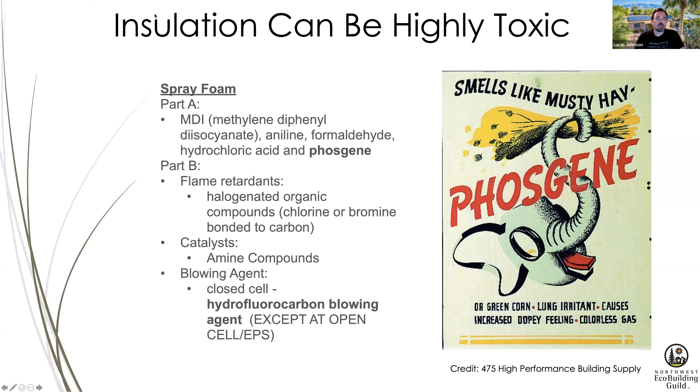A great thing that you just heard about is the red list. The red list is a group of chemicals that are known to have negative human health interactions. It's updated every few years, and it's kind of the epicenter of what you should look at in terms of chemicals to avoid in materials. Now, they can't always be avoided—some alcohol recently got put on the red list, for instance, and that is VOC. It can be bad for us, but you just got to start with the list and use that as the beginning of the decision, and also use context in what you're building and what the chemical actually is to refine that decision.

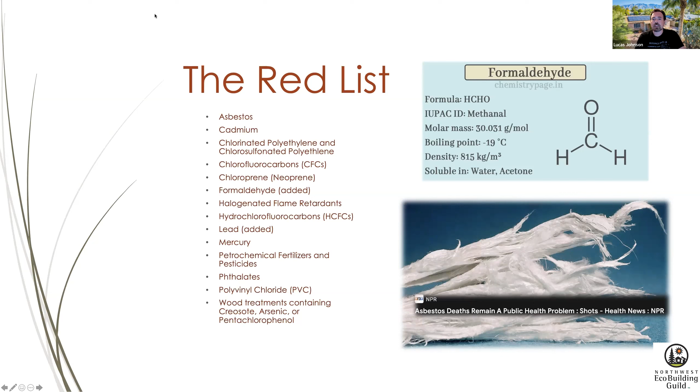When there's a lot of red list chemicals in buildings, we end up very often with something called sick building syndrome. It's where people are effectively experiencing light flu, heavy cold symptoms inside a given building, oftentimes a workplace, sometimes their own home. It's been considered a major global medical issue.

Looking into this a bit more, I didn't realize there are quite a few doctors out there, quite a bit of research on this subject. It'd be very interesting to get the medical field and the building science field together to discuss these things, because a lot of the problems are eminently solvable.

The saying I like to use, if you've heard me speak before, you've heard me say this: the ingredients create the results. There's no emergent magical property of design where you can design out all the impacts that are built into the product, from carbon to toxicity to social justice issues. If that's happened in the product life cycle before it reaches your job site, you can't control that. It's part of the product.

The image that Havelock Wool uses to summarize this is really wonderful. If your fibers are produced through a cycle of warfare, big chemical production, et cetera, exposing people all along the product life cycle to toxic chemicals, that's probably not the most wonderful result for a product that you put in your house. If the product comes from natural evolutionary cycles that have occurred over eons, with well-treated animals, well-managed forests, whatever it might be, if the raw products can come from a natural source, it can really change the game in terms of toxicity.

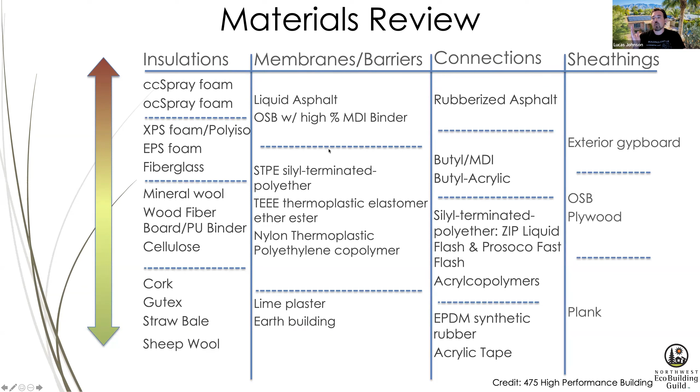So is this about materials only, or is it about much more than materials? Is it about the emergent properties that come from putting materials together in a really good way? And as if you were here early, Kathy was bringing up a really wonderful point about...

Non-toxic being a colloquialism - it's something we say all the time, but it may not actually exist. Even the healthiest materials can trigger allergies in some people, like Havelock wool insulation. Some people have wool allergies, right? Well, then it's not really non-toxic for them in a sense, not good for their health. So that's why the non-toxic thing is not that great of a way to describe things in my mind. That's again the lack of something bad, and I think we should be supporting the inclusion of something good. So I think it's better to talk about this as good or healthy building, however you want to frame it.

So healthy building requires good materials combined with good design.

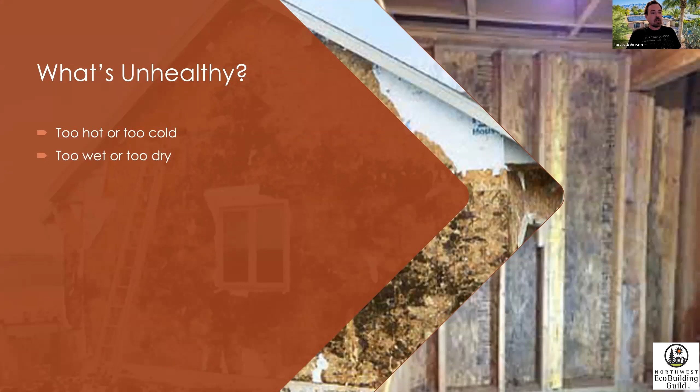To summarize what's unhealthy, from my kind of building nerd standpoint: things being too hot or too cold can cause all kinds of issues with mold. When it's too dry and too hot, or too dry and too cold, you can get a lot of viral issues. If it's too hot and too wet, you can get all kinds of bacterial and fungal issues. Toxic chemicals being included in materials, or toxic chemicals being emitted from certain things like mold, particulate matter that may exist in the air from everything from volatilizing dust when you start cooking to wildfire smoke, whatever it may be.

As I mentioned, mold, EMFs - this is something that's not as addressed as it should be. This is electromagnetic fields. There's a lot of negative health issues that can occur from improperly wiring your electrical system, for instance. Natural gas - all the research out there at this point indicates that natural gas is not good for our health and really should not be in our buildings, much less it's kind of a way to continue our addiction to fossil fuels by being less bad instead of making a real change to being all electric. But from a health standpoint, natural gas is consistently considered to be very bad.

And then pests and rodents, that's another big issue. This isn't a comprehensive list of everything, but this would be a pretty darn good start if you could basically get rid of these issues. Oh, and untreated water coming into the house, forgot about that one.

As I've been alluding to, health takes a lot more than just avoiding bad ingredients. It's not the lack of unhealthy—it takes combining good ingredients in a good way to create real health. An example would be optimizing indoor air quality through non-toxic finishes, furnishings, cleaning, good maintenance, along with continuous heat recovery, mechanical ventilation, maybe even some spot ventilation in the mix too, as we'll talk about in a minute.

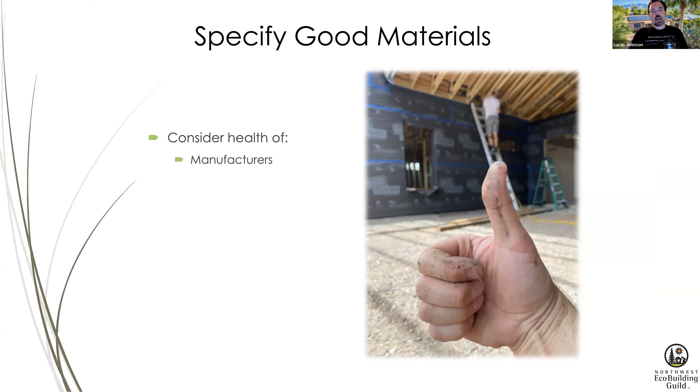So once you've created your do-not-use list, then you start specifying good materials, healthy materials - not just non-toxic, but materials that actually encourage a healthy building. As I mentioned, we want to consider the health of the manufacturers, the installers, and the occupants of the building, and we want to ask questions.

First, is it durable in my climate? If it's a good material but it doesn't work for your climate, you probably shouldn't use it - it's not going to be a good building. Will it dry in my climate? Very important question - basically the same thing, but more about whether it's going to make drying an issue in the building versus whether the material itself is durable. Is it healthy for the planet? And will it provide comfort or joy in my experience of living in this building? Those are all really, really important considerations.

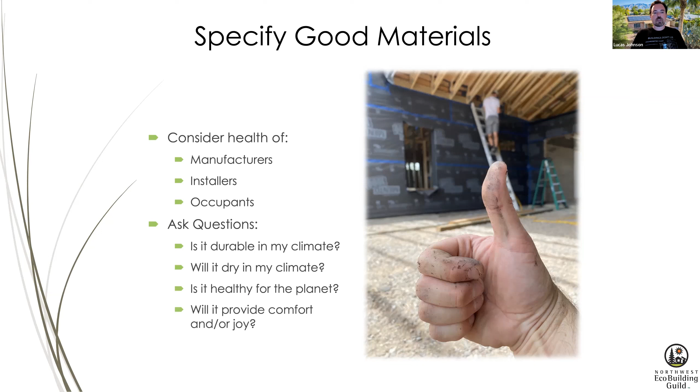It's also about having a good process. Planning and testing is something that we do extensively. This is a wall sample from our Muse project, the 4-unit project we're doing in Phoenix, where we are taking good materials that have been proven for decades in cold climates, but haven't necessarily tried to live through Phoenix summers, and seeing what happens. There's an intense amount of heat, of UV, and then also water during the monsoon season, so it's a really, really good time to try to destroy materials and see what happens.

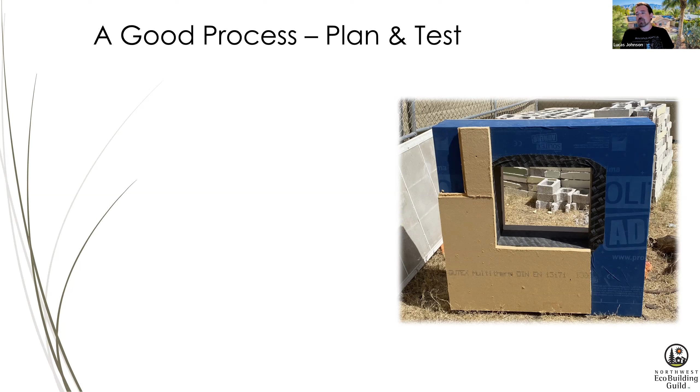As you can see in this image, if your screen isn't blocking your view here, you can see that the membrane we used, called Adhero - when we peeled it back, the plywood underneath was in effectively new mint condition. The plywood outside of the membrane had nearly degraded to dust. It was really, really crazy to see that dramatic of a distinction, that dramatic of a line.

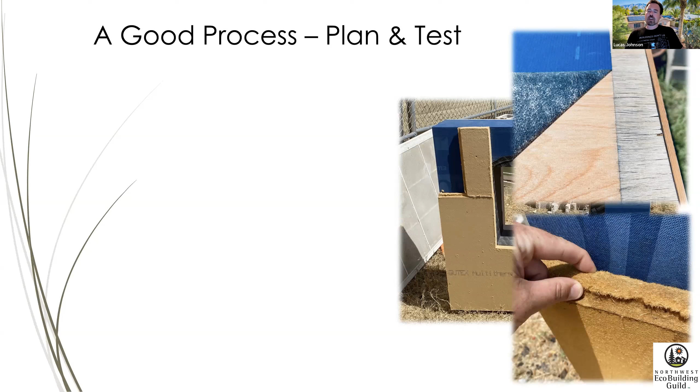And then what we noticed too is these top edges of the Gutex wood fiber insulation, that you can see my hand pinching there in the photo, had gotten quite wet and swelled a bit over time - that's not necessarily a good thing. So what we decided in the end is that every time Gutex was going to interface with an open space - top of the wall, bottom of the wall, rough openings of windows - we were going to treat it with a liquid applied yet vapor permeable, airtight waterproofing material called Visconn, so that the ends of the boards would stay dry and not become moldy. What's the point of using a good healthy material if it doesn't stay a good healthy material over time?

We also do a lot of extensive planning for how we're going to put down certain membranes that we use. This is for a subslab vapor barrier we used called Pango. Termites are a huge issue down here in the Southwest, and you often have to do extremely toxic and temporary termite treatments for your below-grade treatment, along with a standard vapor barrier.

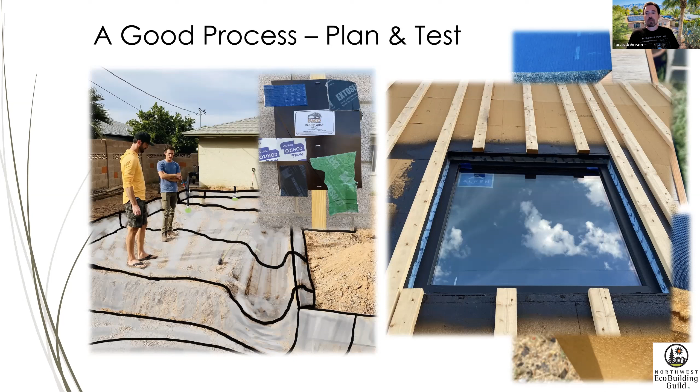But if you use this Pango material, this little black material that you can see, we tested extensively to see what tapes would stick to it. This was south facing and fully exposed to the Phoenix sun, to see what would last better. All of these are Red List free tape options that we were trying with this material, which is also Red List free. The idea there is that we got rid of any sort of toxicity in the soil system, the foundation system. The termite treatment would have to be repeated every about 5 years, but this Pango membrane should last for the lifetime of the building, which we anticipate to be well over 100 years.

So one of the messages is: be good, be healthy from the ground up. This is the Pango membrane laid down over the foundations of the 4 buildings.

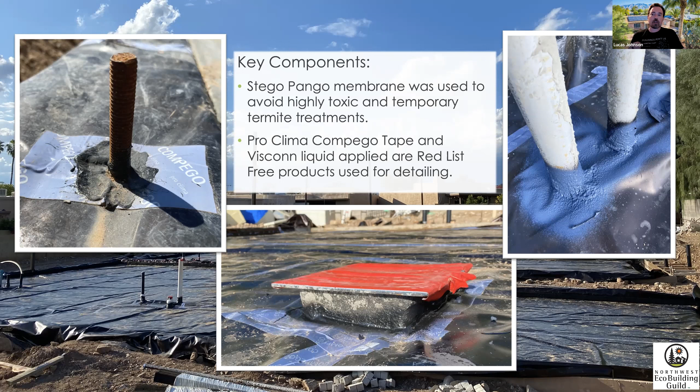So the key components were this Stego Pango membrane, which was used to avoid highly toxic and temporary termite treatments, as I was just talking about. And then the Pro Clima Compego tape and Visconn liquid applied were the Red List free products we used for detailing. You can see the tape on the left around the foundation bolt and around the drain there, and then you can see the liquid applied right after it was sprayed on over the Compego tape to make sure we had a really, really durable seal at that level, so we don't have water seeping up into our building. Because again, one of the key things of a healthy building is keeping water out of the building, or allowing the building to dry sufficiently and not get wet enough to cause issues.

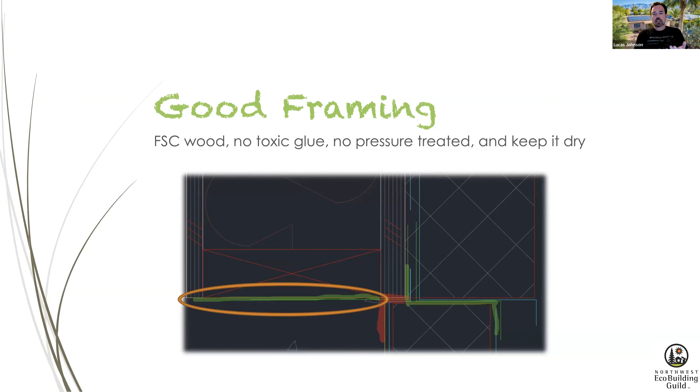The next step, once you have your foundation system down, is you need to invest in good, healthy framing, which is FSC wood, no toxic glues, no pressure treated lumber, and keeping it dry. If you use a material below your sill plate to separate it from the stem wall or slab, depending on your foundation type, you're not only creating a capillary break and air seal, but the code says that since it's now separated from rising water through the concrete, you don't have to use pressure treated for your base plates. You can use normal lumber, which saves budget and decreases toxicity.

A lot of us are putting an air sealing gasket or a capillary break gasket, or both, below our sill plates anyway, and still using pressure treated, which is kind of pointless. So we can avoid the pressure treated, decrease toxicity, and actually have a better building system by making sure we do that. This is what it could look like in the real world.

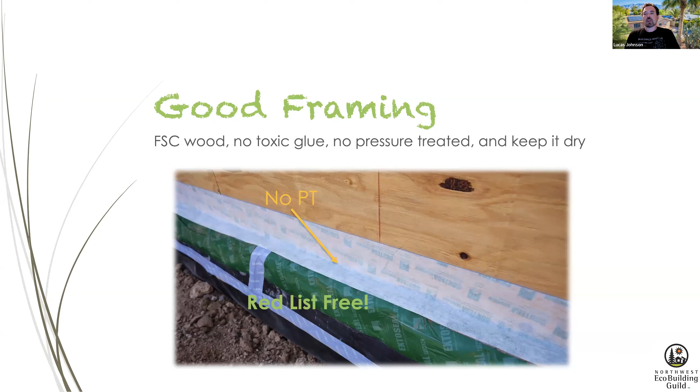This white tape is a vapor open tape used to air seal from the plywood sheathing, continuing under the base plate. That allowed an airtight, waterproof, yet vapor permeable connection at the plywood level, while also letting us avoid using pressure treated lumber. We like to say no PT, red list free. That's what we're trying to do, is all of these critical control layers with red list free materials. So even the best ingredients aren't perfect.

We use 3/4 inch plywood for structural reasons, to make our exterior insulation batten system and heavy stucco cladding work. We needed very beefy plywood, and got it from a really good lumber yard, but due to monsoon weather, some of the sheets ended up with mold on them. We had to remove those sheets and put in new ones, because we don't want to be adding mold into the building from the very beginning. We did some basic treatments to some areas, but everything moldy was removed, returned, and replaced with plywood without mold.

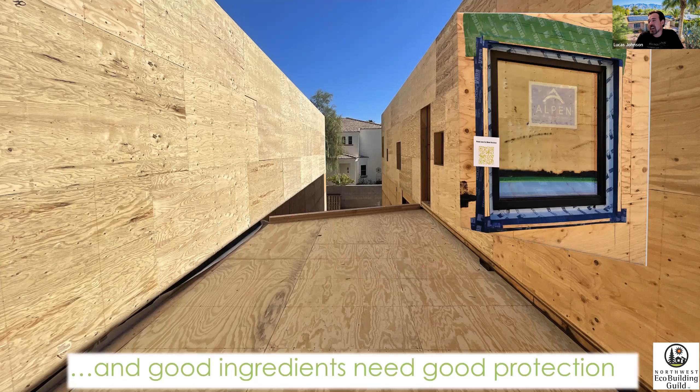The lumberyard was actually really cool about working with us on that. A lot of them will take the blame for having sent moldy lumber and will help make sure not to poison the future occupants. So just ask nicely.

Hopefully it works. Another thing is that good ingredients need good protection, especially around rough openings. There's a quote from Joe Lstiburek about how he could make amazing buildings if they didn't have to have windows or people. Those are the two things that really tend to stress the durability of the building. Windows tend to be a very common failure point that water enters at, and if water enters and does not exit, it can create all kinds of major health issues inside the building. So we ended up with buildings that look like giant blue Smurfs.

Every square millimeter of plywood was covered with a peel and stick membrane that's airtight, waterproof, vapor open, but also red list free. We were able to achieve extremely high levels of performance. These units are all lower than passive house as far as airtightness is concerned, but we did it entirely with red list free materials.

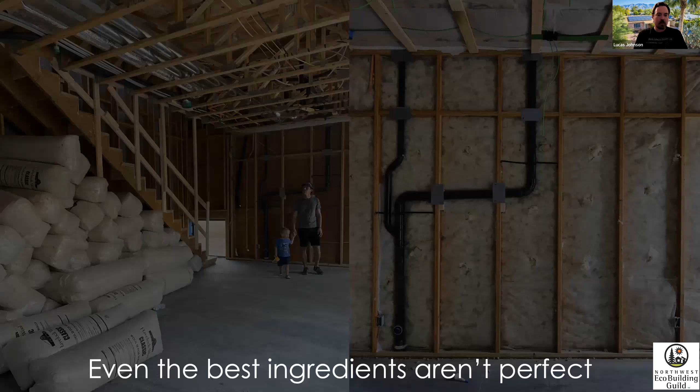On the note of even the best ingredients not being perfect, one thing we think about often is managing formaldehyde from wood products. Almost all wood products have naturally occurring formaldehyde that's going to be released at some point. The Havelock wool insulation has a property of being able to irreversibly bind formaldehyde, so having a bunch of wool around all your wood framing should reduce potential formaldehyde exposure. We'd love to do some formal research on that, but that's hard to make happen. Maybe soon we'll try.

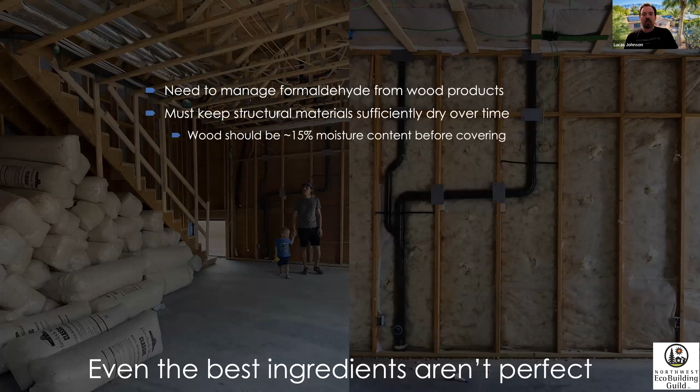Keeping structural materials sufficiently dry over time is obviously mission critical, one of those things I'll keep repeating. Some data: wood should be about 15% moisture content or less before covering, that's your sheathing, your framing, etc. Remember that everything will get wet at some point somehow, so allowing it to dry is very, very important.

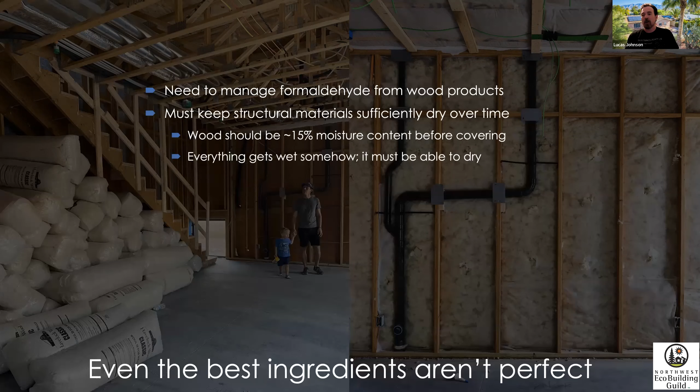Moving into good insulation. So now we're framed up. What are we going to do to insulate the building? What are we going to do to not just be non-toxic, but to make it healthy, to add another degree of comfort? So we need to use healthy, vapor permeable, low carbon, and durable insulation options.

This is going to be some of the ones that we love. One of the big questions we always ask again and again is, what are the ingredients? In terms of insulation, an analogy we like to think about is, if it were a jacket, would you wear it? Because you're going to be living literally inside of it. It's like having a jacket with a hood that's slightly looser around you. Or is this a tent that you would go live in? It's just bigger space and you don't see the insulation because it's covered by finishes. But would you actually want to be surrounded in a bubble of foam insulation? Me, no, I really would not.

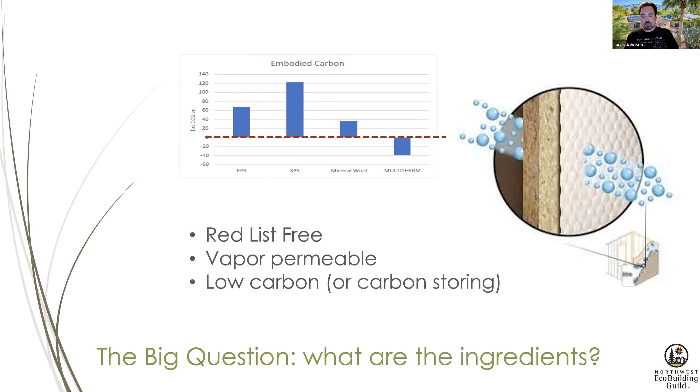Exterior insulation, cork is another option we absolutely love. There's some really regenerative and interesting things about cork and the cyclical economy it's created in, in Portugal and all that stuff. So it is a really neat product that we would love to keep using more of. One of the cool advantages is it can be used as both your cladding and your exterior insulation, so it can kind of be an all-in-one situation. That's kind of a tough sell for a lot of clients, but for the right client, it could be a really, really good option.

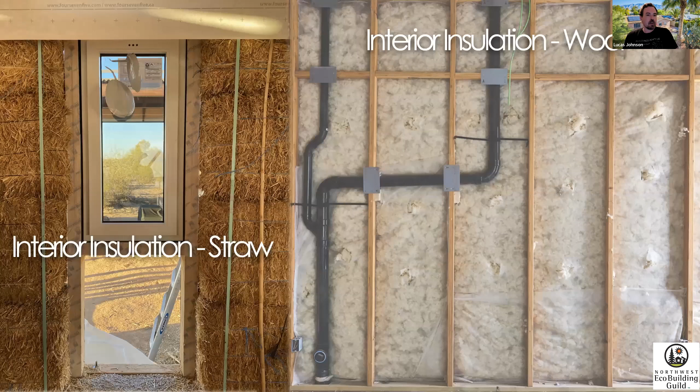Interior insulations that are healthy that we love: wood insulation, again, is one we really like. There's also loose fill and bats available. Straw insulation - I'm calling this interior, even though it spans interior to exterior, but it kind of takes the place of your cavity insulation, so in my mind, I'm considering it interior insulation.

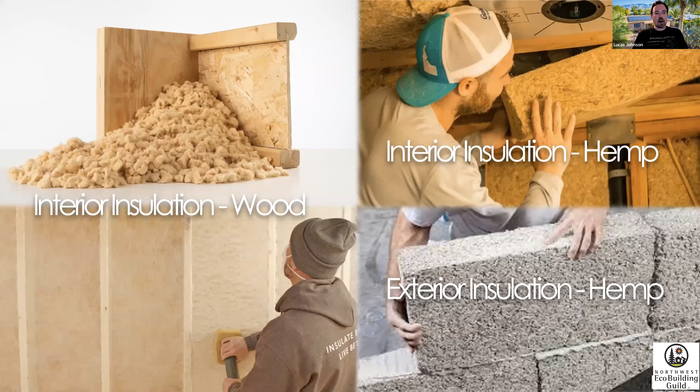Wood, as I've mentioned, is a wonderful product for interior insulations and exterior. Hemp bats, hemp wool bats, are also a really great interior insulation product. And then for exterior insulation, hempcrete is an amazing product as well that we should certainly start using more of.

One of the cool things about hempcrete is it actually sequesters CO2. All these other materials generally are carbon storing, which means that they hold the carbon they've absorbed throughout their life cycle up until they're installed, stored until the product is removed. But that's storage - it's by nature somewhat temporary. Sequestration requires a phase change and a permanent fixation into something. So hempcrete's really neat in that it actively draws carbon dioxide from the air when it's curing and turns that into a carbonate structure, so it really sequesters that carbon. It's a really, really neat product. And obviously, hempcrete type products are not going to have many issues with mold or fire, other things like that that can influence your health.

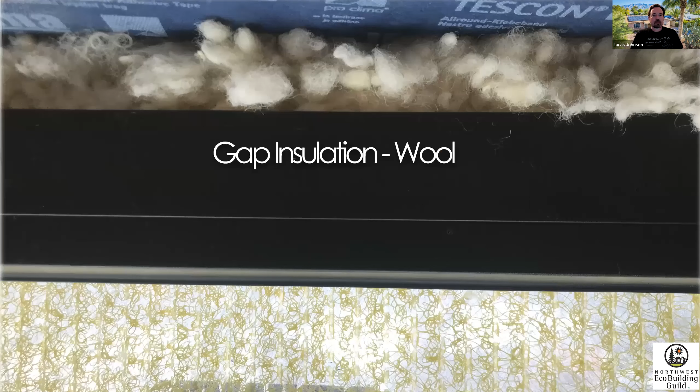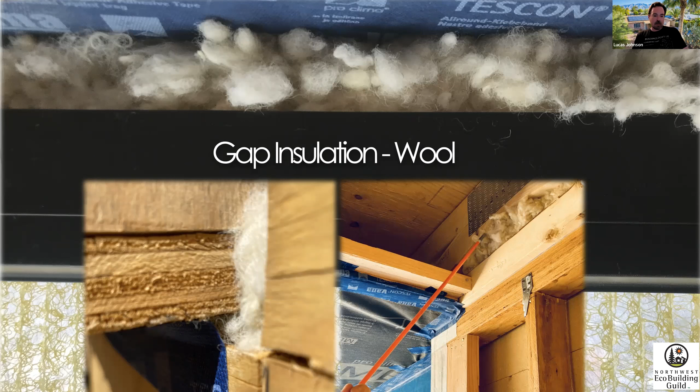For gap insulation, so around windows, between your sheathing and your plywood bucks, if you have them for your exterior insulation or whatever, which you can see here, we found that the loose fill wool is just such a killer app because it's so easy to stuff. It's R4.3 per inch. As far as water management is concerned, it's the best option out there. And as far as health is concerned, unless you're allergic to wool, it's one of the healthiest options out there as well. So we've had a lot of success stuffing wool into every random cavity around the building, and then of course, when you can, covering it up with an airtight vapor open material, like the tape you can see in the lower right-hand corner down there.

So for our air and water control, we need to require red list free materials. They're readily available from membranes, tapes, liquid applied aerosol sealants, adhesives, vapor barriers. Many of them have a declare label, and many are just red list free when you look into what they're made out of. But just ask the questions, try to figure out what the ingredients are in these materials you're specifying, and try to avoid anything on the red list.

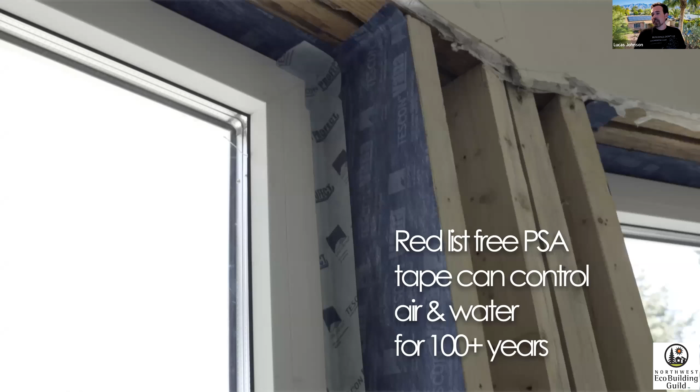Red list free PSA is pure solid acrylic or pressure sensitive adhesive - can mean both, so it's kind of confusing - but red list free PSA tape can control air and water for 100 years. Oftentimes you'll see caulking around windows, but most caulking products are not very healthy and most are very failure prone. There's differential movement between something like a window frame and wood framing, so inevitably, as those materials move differently over time, you're going to shear the caulking and have leaks that can then lead to mold accumulation, ambient air getting in during wildfires, whatever it might be.

Tapes are a much more durable option, and they can be used for everything from wood framing to straw bale buildings, interiors, exteriors. I would highly recommend taking that approach for durability and toxicity reasons.

Then once you've done your proper foundation, your proper framing, your proper insulation, your proper water control and air control, now we need to make sure we have good ventilation. It's the lungs of our building. And that ventilation needs to have efficient motors, high quality filters, and heat recovery. If it doesn't have heat recovery, we can have the too hot, too cold issues, or the too wet, too dry issues, neither of which are good for health. So heat recovery is a critical part of any sort of continuous ventilation system.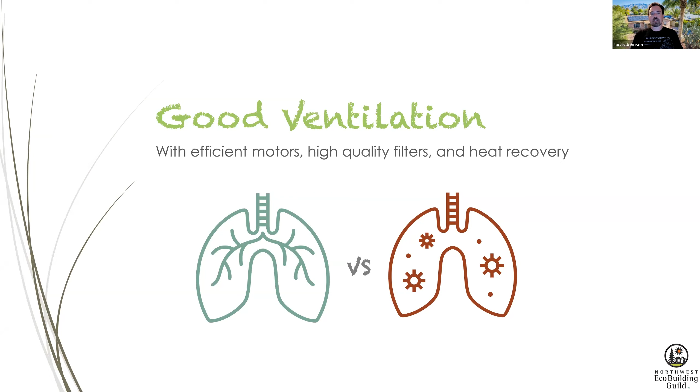So once you have set yourself up for success, one of the really important things to do is use data to validate that success. You need to be monitoring your IEQ.

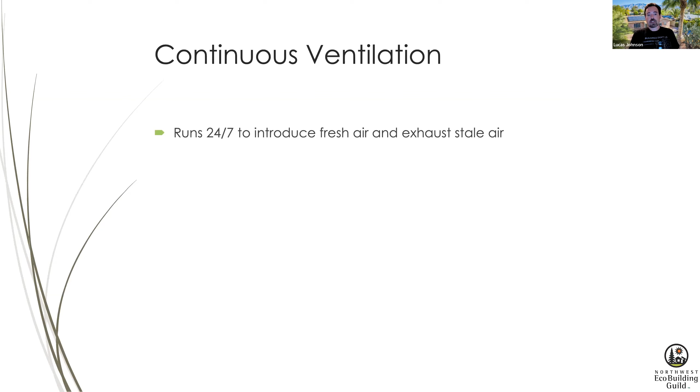So because there's such great degree of variation of both indoor and outdoor air quality, what we really need is continuous fresh air ventilation with really good filters that runs 24/7 to introduce fresh air and exhaust stale air from the building. That is, unless there's wildfire smoke, where most systems should actually be turned off and you should rely on an in-room plug-in filter. Because the filter systems for these whole house systems don't tend to have the type of filters required for wildfire smoke, and those are really not even that available at a residential level anyhow.

Continuous ventilation also helps reduce the risk of radon exposure if you happen to be building in a zone where that's a big issue. It minimizes the risk of moisture failures such as mold because it helps balance humidity inside the building.

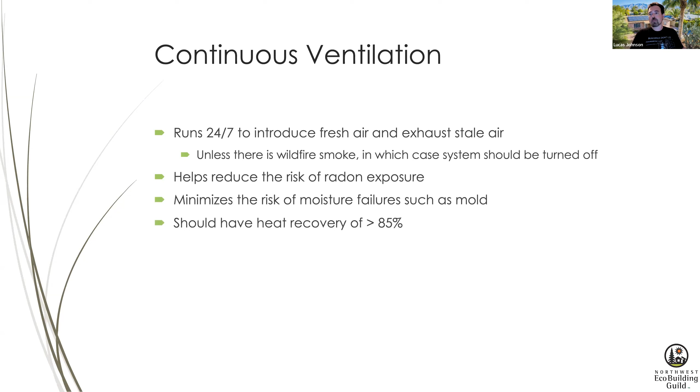Ideally, systems should have a heat recovery of over 85%, because being too hot or too cold is a big part of being unhealthy. The ductwork, if any, must be air sealed and well insulated, so you're not pulling in a bunch of pollutants to the system, and you're not having that 85% heat recovery dramatically drop because you have ductwork running through uninsulated space. You should also have MERV 13 filtration at minimum. MERV 14 or 15 is ideal if possible and affordable. Specialized filters such as activated charcoal may be needed for these systems as well.

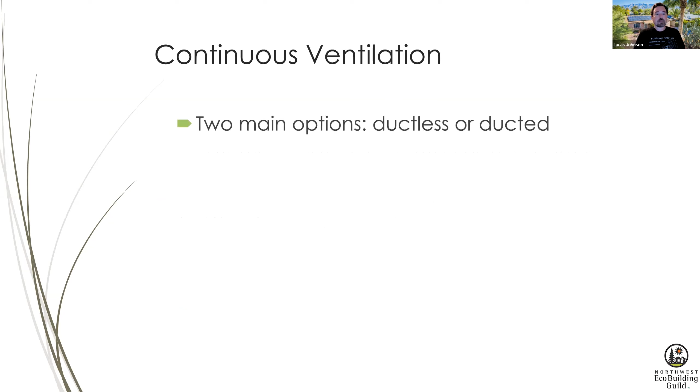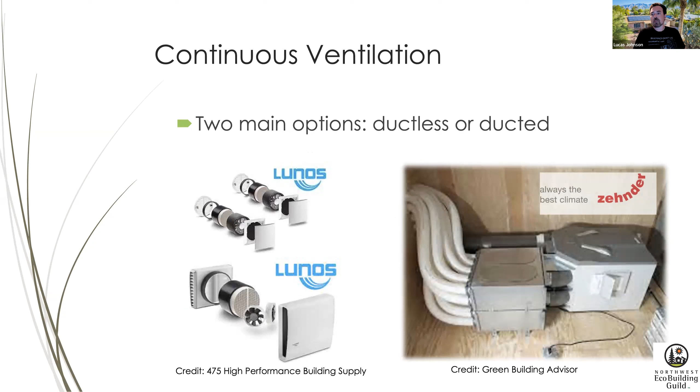There's two main options of continuous ventilation, ductless or ducted. The Lunos system is my favorite ductless, and the Zehnder is my favorite ducted system. We've also had some success with Panasonic systems in some of our projects down here in Arizona.

Spot ventilation is not a good way to do continuous ventilation, like running a bath fan on continuous, a kitchen hood on continuous. Exhaust only is going to pull in a bunch of stuff to your house that you probably don't want in there, so that's really bad for air quality. But spot ventilation can be a really nice icing on the cake when your continuous ventilation system needs a little extra help to deal with a spike in air quality issues.

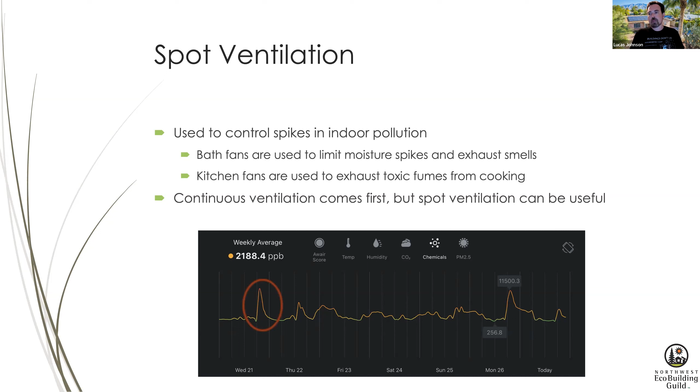So in this case, we were cleaning the house. There were some chemicals flying around and it was really hot outside, so everything was buttoned up and we weren't getting fresh air into the house. Running a bath fan can help exhaust some of that chemical concentration that had an instantaneous spike.

Or this is when I believe I burnt some meatloaf, some turkey meatloaf I was trying to learn how to make, and we had a massive spike in chemicals from the burning in the oven. So a kitchen hood would be a really great thing to turn on to get rid of that spike of chemicals.

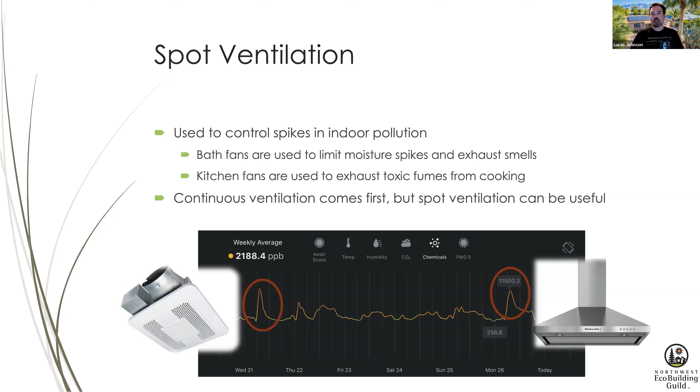In other words, continuous ventilation comes first, but spot ventilation can be useful in addition. Do not confuse those two things. Spot ventilation should not be used as continuous ventilation. Continuous ventilation should be balanced with heat recovery. Spot ventilation is exhaust only.

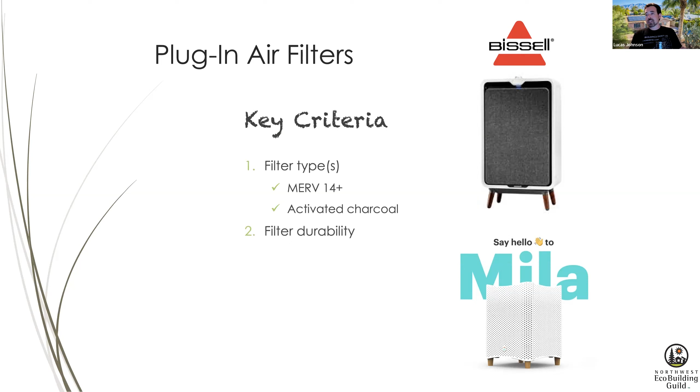One of the things to really think about is that filter durability and cost - how long do those last and how much they cost to replace. And then also the main thing might be noise, as far as the criteria for buying one.

I did buy this Bissell one. It's a bit noisy, I kind of regret it. I wish I'd spent more on the one my business partner told me to get - he has this Mila system. There's a lot of them out there now, from big brands like Panasonic, and smaller startup brands like Mila. This one is really, truly awesome, but it's like $600. This one, the Bissell, was like $300. So I ended up going with the less expensive one to try it out.

It's quite noisy, it's kind of big, and the aesthetic's okay. Kind of like it, but again it's kind of big, and it's noisy enough that no one in my family likes it.

And maybe if you take one thing away from all of this tonight, it's change your frickin' filters. It is such an important and missed step.

This is the filter that came out of a system at my house after we got back from 3 months away. The house sitters we had did a wonderful job with everything, but did not understand how bad not changing a filter can be for an air conditioning system. And we almost had the whole system fall apart. Obviously you do not want to be sucking air in through this - it had started molding on one side. It was really bad news. We had to clean the whole system, et cetera, et cetera, et cetera.

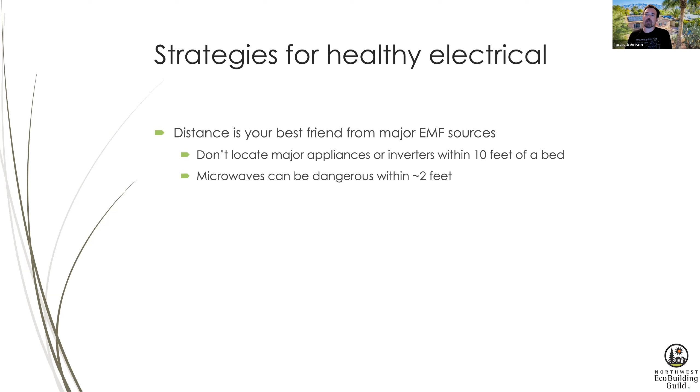Some of the strategies I found for healthy electrical systems: distance is your best friend from major EMF sources. Don't locate major appliances or solar inverters within, say, 10 feet of a bed. When I took a Gauss meter around many years ago and measured a lot of stuff like smart meters, microwaves, solar inverters, et cetera - a Gauss meter measures electromagnetic forces - that whole old wives' tale of microwaves being dangerous within 2 feet is actually probably true. There's a pretty scary level of EMF when you're within 2 feet of an operating microwave. If you're 4 feet away, there's basically no measurable radiation. The EMFs degrade exponentially over distance. So again, distance is your best friend.

Collect data. If you can, get access to a Gauss meter and go measure these things when they're plugged in and operating, and see what you actually measure off of them. There's a whole subcategory of building science, building biologists who really focus on this kind of stuff, especially around EMFs, material health, and those kind of things.

Locating the main panel away from occupants and operating most of the house off a sub panel can be a really good idea. You want to avoid grounding electrical into your slab or your foundation system.

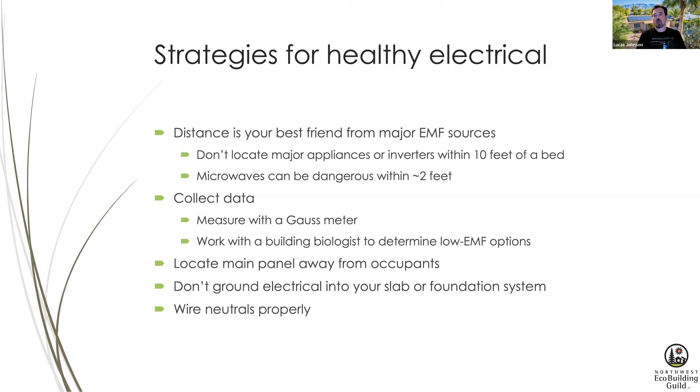One of the things I did not know, this one kind of blew my mind. The video I watched was probably the nerdiest, most 1980s video I've ever seen, but it was very fascinating about how so many buildings have improperly wired neutrals. If we don't keep the neutral and the hot physically adjacent to each other, they're supposed to cancel out the EMFs of each other.

So if you separate your hot and your neutral splits off on a different loop or something like that, that separation actually causes issues and creates EMF output. One very common example is when wires are coming together at a junction box, you have all the neutrals put together, but then oftentimes you have the two hots split like this.

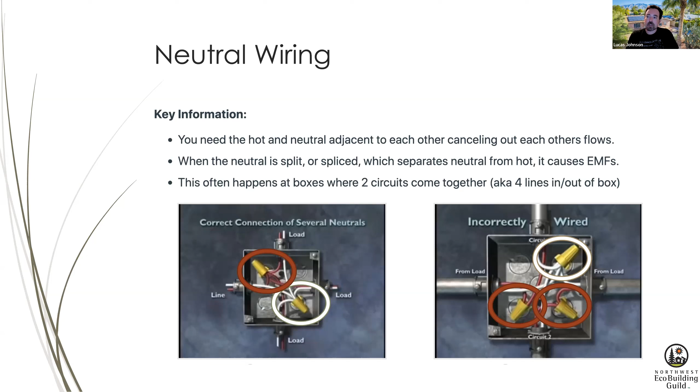And code does actually require wiring like this. The problem is this often doesn't get caught because the lights will still turn on, everything will still work. But if you measure with a Gauss meter, or measure the flow on one of the lines, you can have some pretty scary situations.

Good. Now that we've dealt with some of the core systems of the building, we're down to the plumbing level. We talked electrical, we talked mechanical systems, we talked enclosure systems, now it's the water systems.

Water is a core ingredient of life, but the quality ranges dramatically. In Seattle, where many of you are attending from, and the Northwest in general, the water quality is really good. In Seattle, the water tends to be very soft, which can be very corrosive to pipes. We have the polar opposite problem here in Tucson, where the water is exceptionally hard and creates a lot of scale and issues like that.

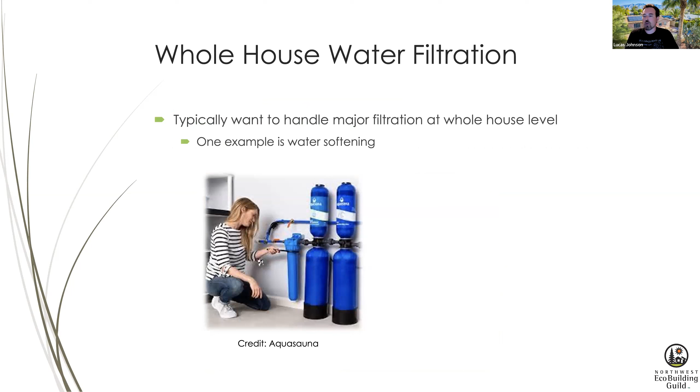So down here in the Southwest, we end up with whole house filtration systems in almost every new building built, where major filtration goals like water softening are achieved at the whole house level at the main supply in. Again, these systems don't work unless you change your filters. So change your filters. There's also options available at fixtures.

Let's say you can't figure out physically or financially how to do the whole house option, you can also have some options at the fixtures. Sometimes you do these in combination: you do the whole house water softening at the whole house level, and then you do another filter at the faucets or something to capture other things that could be in the water, chemicals, pharmaceuticals, whatever it might be that you're concerned about, metallic particles, whatever.

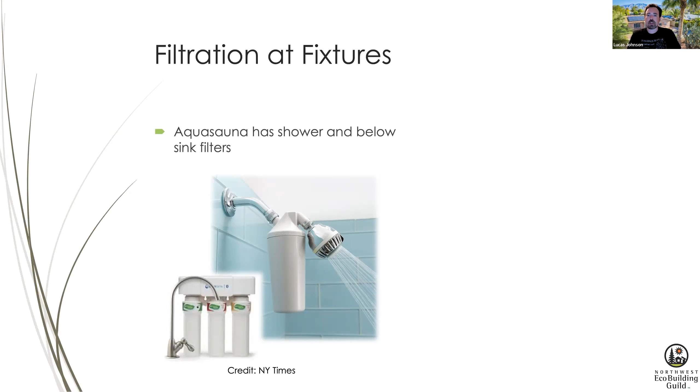Aquasana is one of the main brands out there. They generally have pretty good quality products, but there's a lot of newer stuff coming out. Our favorite story is that the Body Glove company, famous for wetsuits, apparently their founder felt quite bad about the environmental impact of wetsuits and wanted to help solve water, so invested almost all of his fortune into coming up with these Body Glove water filters, which are actually spectacular. It's what we're using in our own project.

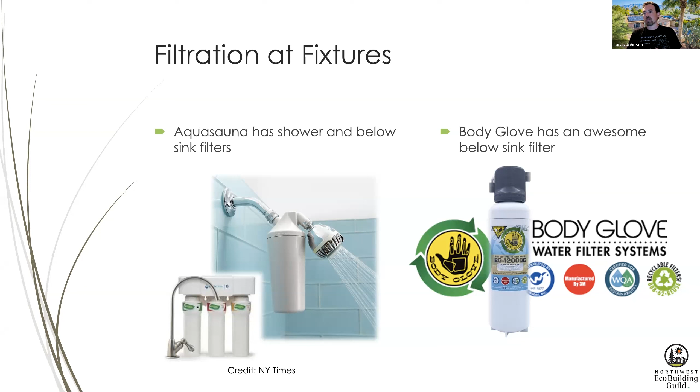Whole house water softening, but then at all the fixtures there's a smaller water filter that can be more easily replaced, and filters out quite a bit more than just doing the softening. So now we've handled water. Again, these are surface level because this is an hour presentation, but now that we've addressed water, we need to have some good final touches, like clay plaster, non-toxic or healthy floor systems, and our maintenance efforts.

Healthy flooring: real wood floors, a really nice option, though quite expensive. Cork floors, I'm standing on one right now that my buddies at Green Home Solutions sold me, and they're a wonderful option. Saltillo tile is what we're about to put into the rest of the house other than my office that has the cork floor. And marmoleum, we've used that in our bathrooms and it's an absolutely amazing material.

We don't have a super fancy house, as you can tell from it being the 1,200 square feet of solar panel glory behind me with original 1953 single pane windows.

You know, it feels like you're stepping into a multi-million-dollar mansion when you step on this marmoleum floor in the bathroom. It really is an amazing material, and it's probably the healthiest material you could put down as flooring for a bathroom. So really nice combo there.

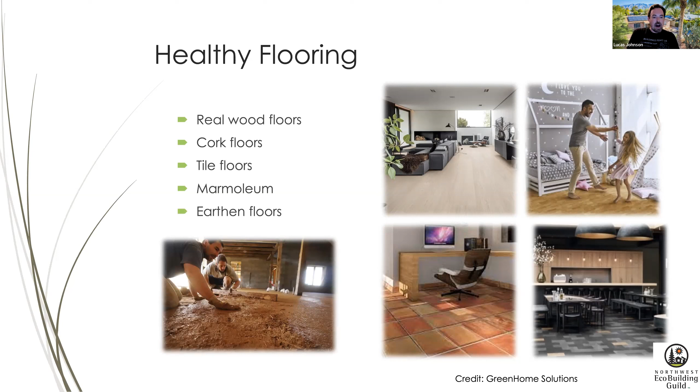And earthen floors are awesome. I need to learn how to execute these. Maybe Aaron will provide some examples. Healthy finishes, finished plywood, it's a pretty common option. I see Aaron gave a thumbs up there for the earthen floors, love it. Clay plaster is a wonderful option.

If you're gonna use paint, try to use zero VOC paints. And then also really consider the VOCs of the furniture and everything else you're putting in there, cabinets, whatever it might be. You don't wanna create this awesome thing that you've invested all this time and money into and then fill it with a bunch of furniture that's emitting formaldehyde and other gross chemicals.

And then also cleaning is necessary. I have to tell myself that every day, and I must clean up now. It does make cleaning a little less painful when you're using healthy materials because you don't get a headache afterwards, things smell nice. So green cleaning materials are extremely important as part of your healthy building maintenance plan.

Lower or zero VOC cleaning supplies, looking for natural ingredients, avoiding scents. Scents can often be just labeled as perfume or added scent, and it can be 100 different chemicals, but the manufacturers have argued that they are trade secrets that they don't need to disclose the mix of, so they can hide a ton of chemicals in perfumes. So be really, really, really careful of added scents.

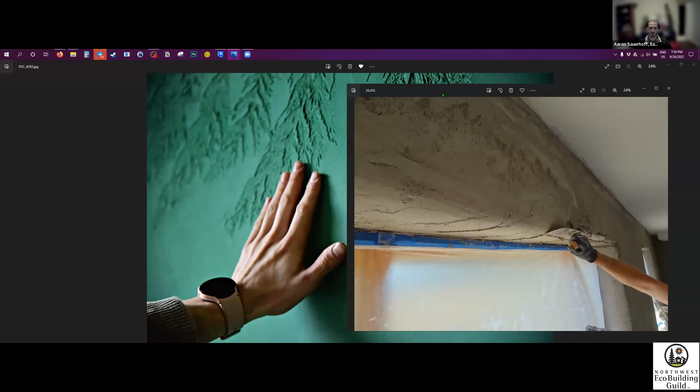What else? Some other cool pictures. The process of applying natural plasters is fantastic. I've been working with some really brilliant, good-hearted contractors in the Northwest and the Southwest specifically, that are pushing the edge to productionize natural building, especially in the plaster world.

Our friend up here, his name is Tanner. He runs a company called Northwest Natural Homes, and I design homes for them. I work with their clients, and they have been pushing the edge to use mortar pumps and sprayers to apply clay plaster and lime plaster at a very fast and high quality rate to the inside and exterior of buildings.

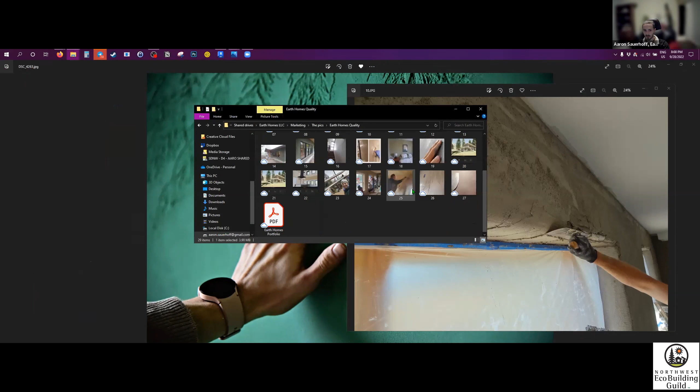They came out and plastered one of ours, I have a picture of it. Here's another one of their homes. They've been doing a lot of really good work, and I've been learning a lot from Tanner over the last 10 years about the practicals of natural buildings. Plaster specifically, he's a very, very smart natural building contractor in the Northwest.

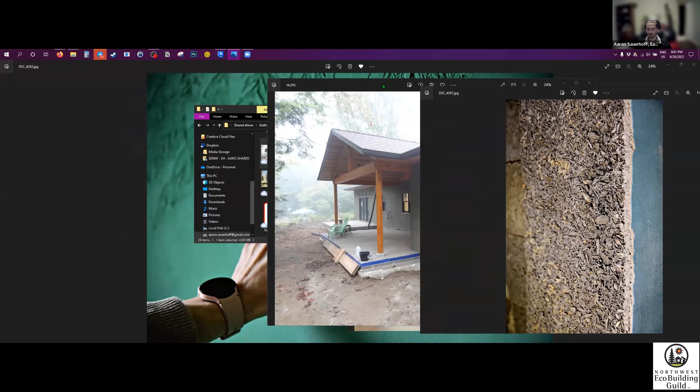So yeah, doing it quickly, they came out and we plastered the exterior of a home in about 2 days, base coat and finish coat, about 1,800 square feet, very quickly. It was very fun.

Block materials, so hempcrete, Faswall. There's a few different options for building with natural blocks, materials made into blocks that can be very quick, very healthy. This is just a cool picture that shows natural clay plaster as a base coat, and then a finish coat that we put on top, which we then pigment using natural mineral pigments, according to whatever the client's desires are.

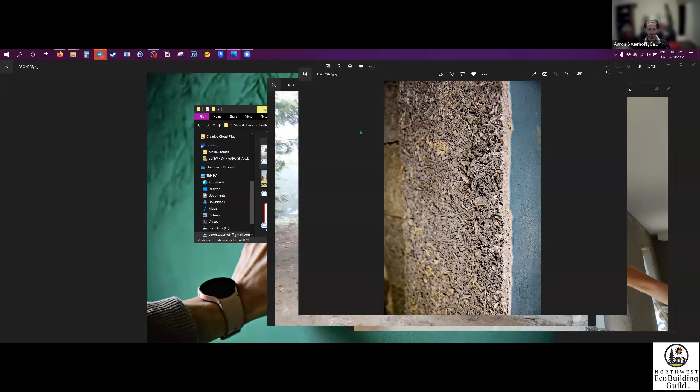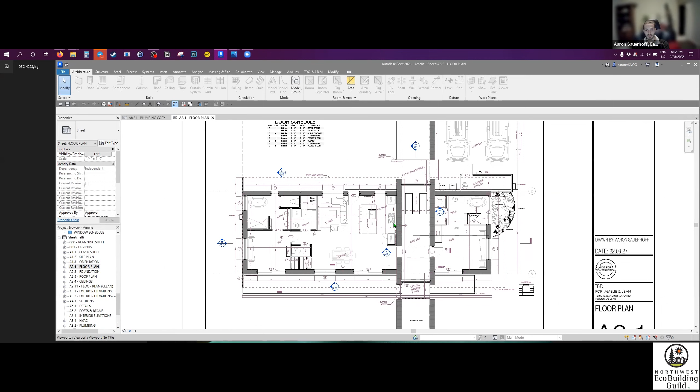Yeah, I do want to go right into this real quick and talk about straw bale and rammed earth. This is a fun project that Lucas and I are working on with another awesome building contractor named Ray. It's a cool house in the Tucson area that uses straw bale as the primary exterior wall system, and then a rammed earth component in the middle. So it's a hybrid structure.

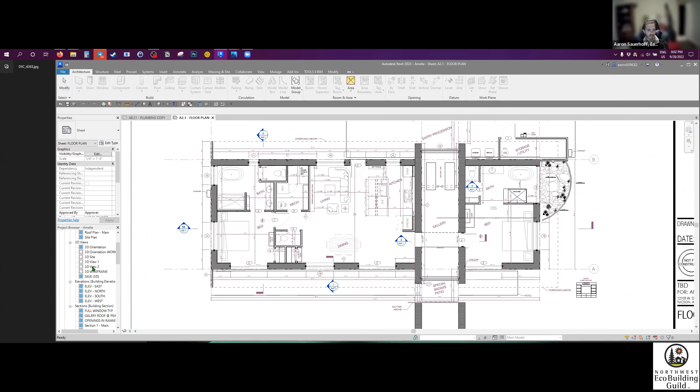And the details associated with this kind of building are really quite simple. They're easy to plan, to detail, to model.

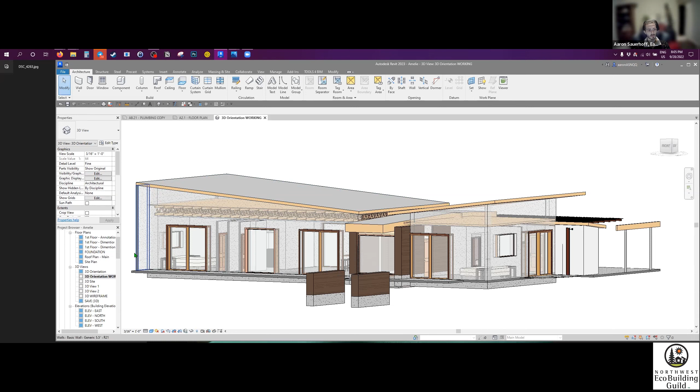So, go to a quick section, because window openings are really simple. Headers are simple to do. Anyway, we can go into details another time, but I want to say and affirm that natural building

So yeah, if for those of you who have an existing designer, have an existing set of plans, or found a set of plans that you really want, but don't quite vibe with the architectural style, or want the building system to be changed, you can ask me: can I build this with straw bale? Can I build this with a hempcrete alternative? Can I build this with clay? Can I use clay plasters here?

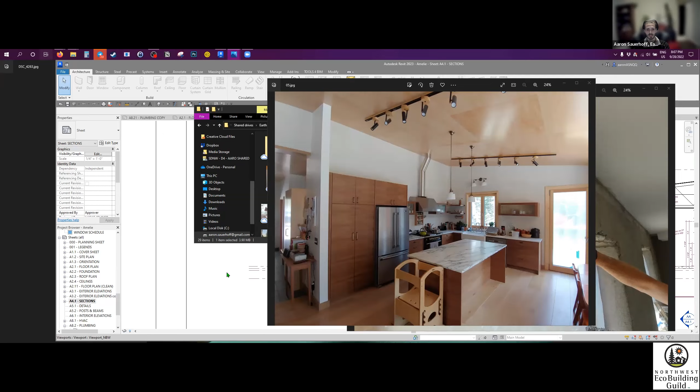Lucas, did you want to talk about this project? Did you want to highlight anything about this project any further? Sure. I was going to say, and I love the points you were just making, and the point I'll make is actually kind of along these lines too.

There's the misconception that natural materials make you have a certain aesthetic, right? And it's not hard to integrate natural materials into almost any aesthetic. I think that's a really key point.

But maybe another step to take, or another thing to consider, is the ability of natural materials to become a natural, beautiful, unique finish that fits the local area, that becomes a statement piece, et cetera.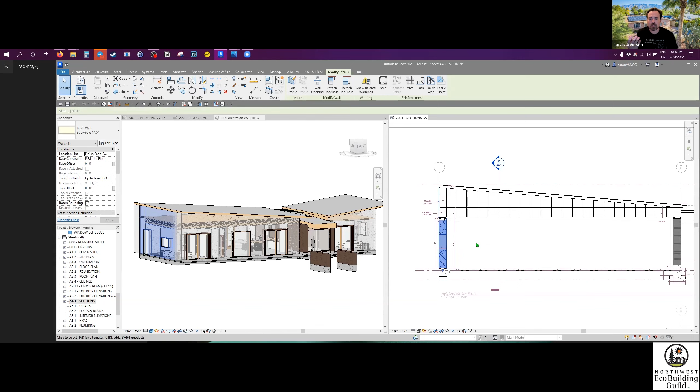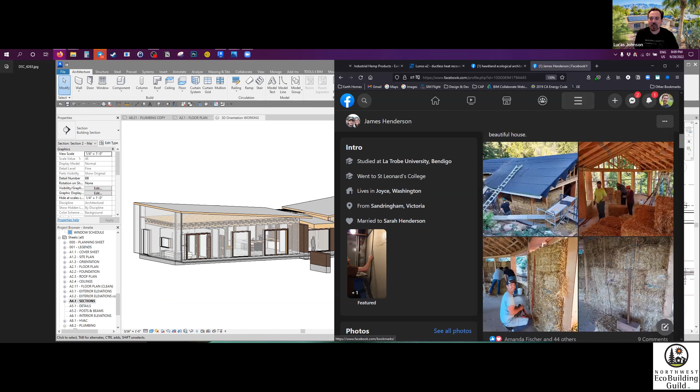So one of the really big things that people look for in the Southwest is slot canyons, right? They're an area where you have a narrow canyon, usually some water at the bottom, shade. It's a wonderful refuge in the desert, but usually you're sharing that with a bunch of other people, animals, et cetera. It's not conditioned at all, those things.

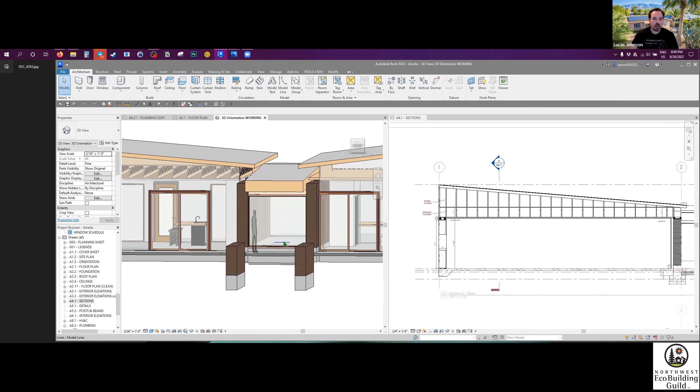So the inspiration we were drawing from - if you pull up the 3D rendering - with this rammed earth, this double rammed earth wall, that situation you see, there's glass on both ends of it. So it's conditioned space that goes all the way through the building, with a sunken floor that has a conversation pit and a yoga zone inside of it, at the client's request.

I think it's also what I would have wanted to do for this, because the idea is to create this almost private slot canyon, your own personal space to enjoy life in, relax, hang out. It's a great space acoustically for music, so sound is part of health too. The sound in this space, for conversation or listening to music, should be very healing and relaxing.

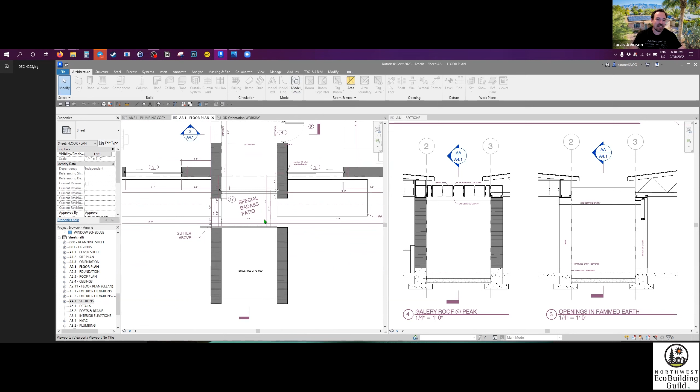The ideal is to put a little barrio pool, as they call them, a tiny pool that can be heated during winter as a hot tub and become a plunge pool during summer, down at the end, outside, where we have the special badass patio. I'm going to keep that one secret for now, but we'll reveal it once it's designed. It's a really cool idea.

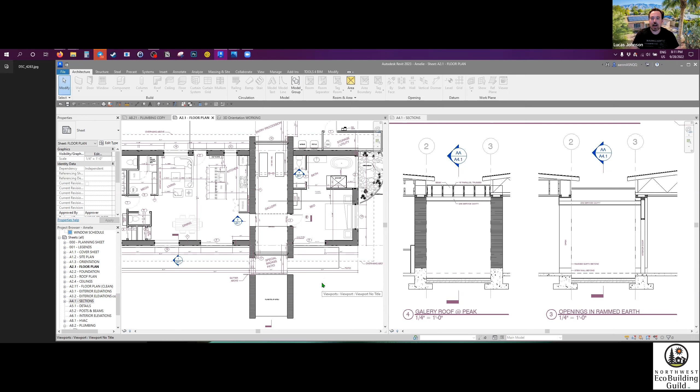Basically the idea is, in a slot canyon, the journey ends when you find the pool at the end. But building this whole thing out of wood framed walls just wouldn't work. Having it literally be rammed earth, where the earth comes from the site and frames a view north-south to the mountains, natural materials really do allow you to create those biophilic elements that are so good for our minds. You need both mental and physical health to be a balanced individual, so from both standpoints, natural materials can be so rewarding and exciting to work with.

Yeah, yeah, thanks for sharing more of the story. It's one of my favorite parts about designing homes.

The cool thing is, since we're designing for comfort and health in this building, it's worth noting it's also going to be passive house level performance, super durable from a water management and UV-in-the-desert standpoint. So it should last for a very long time.

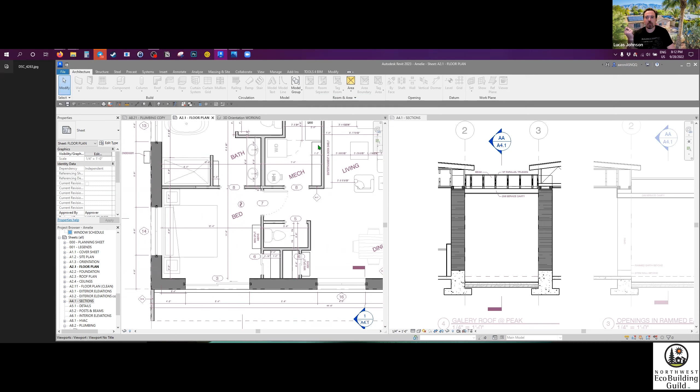With the extensive use of straw bale, cellulose, and some wool details, I think we're going to be pretty close to carbon neutral up front in this construction. It'll be about 80 to 85% less carbon per square foot than a standard building at minimum. Depending on what straw bales we use, we may actually be carbon storing up front.

The point is, if you design for health and comfort, you almost always end up with a truly good building. If you're just designing for efficiency, we often end up with unhealthy, high carbon impact buildings. But if we really design to optimize health, and include comfort as part of our definition of health, that will create much better, lower carbon impact, more durable buildings than designing for efficiency ever would.

And they end up being very efficient buildings. Don't get me wrong, efficiency still happens, it's just not our end goal. You have to go far beyond efficiency to get to healthy.

Wow, to go far beyond efficiency to get to healthy. That's cool, I've never said that one before. I kind of like that one. Luckily this is recorded, right? Yeah.

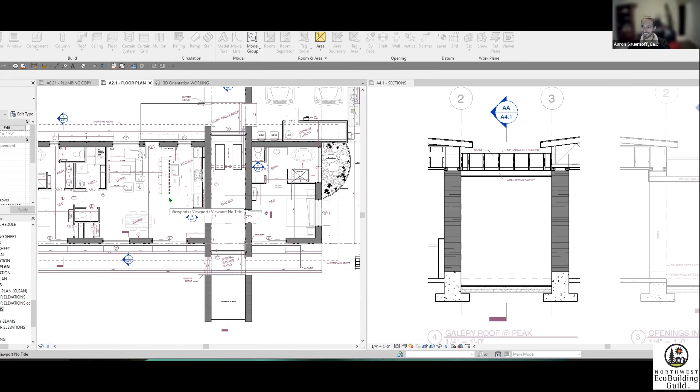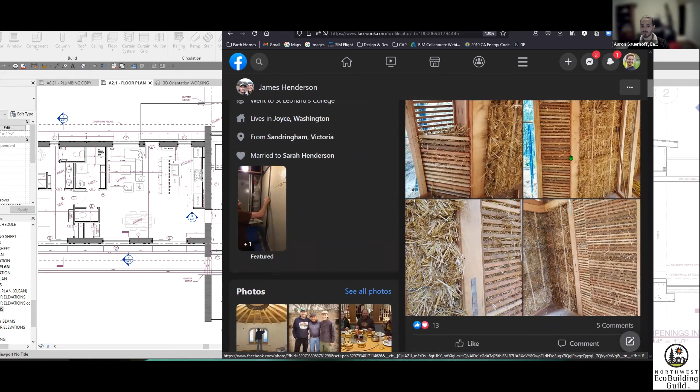I just wanted to scroll through one of the contractors I work with in the Pacific Northwest, doing a really cool straw bale build right now. Is that reclaimed loose straw they're putting into that? No, I think it's baled. Oh, okay, it looks like they were stuffing shavings into that, like a wood matrix. Oh, they might have. Oh yeah, sure. Oh, that's a great detail.

There's a lot of extra straw on site, right? And it'll rot into methane or burn into carbon dioxide, or you get it stuffed into a creative place and it stays there for a very long time.

On that note, I just want to say the vision I see is, Kathy, I know you'd vibe with this, because this is a big part of why people are so passionate about hemp. If we can incentivize the agricultural industry to grow our building products in a very fast, high biomass way, building soil and repairing the land, then we as a building industry have a responsibility to sell that vision as a solution. Say, hey, we can achieve what you want and store a massive amount of carbon.

This building that you want to build is an opportunity to sequester, through the process of growing the material, many tons of carbon. And talk to me about the beam tool, the beam tool.

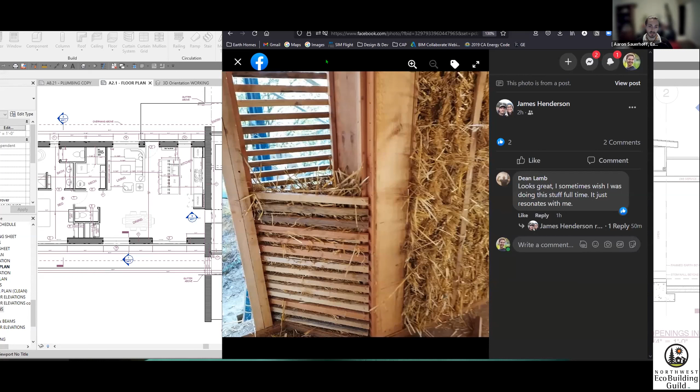Lucas also knows about the beam tool. There's a cool training I got coming up next week on that. But it's a great calculator that just came out for free, a very comprehensive calculator that can calculate the carbon footprint of your building pretty accurately too.

Footprint, either positive or negative. Very much. And what's crazy to tie these things together is if you use all of those healthy insulations we've been talking about, most of those are the secret weapon to the climate crisis, which is carbon storing insulation. It's pretty crazy, those lists line up almost exactly. The healthiest insulations that provide the best comfort have the greatest carbon storage. We should be incentivizing those, as you're saying.

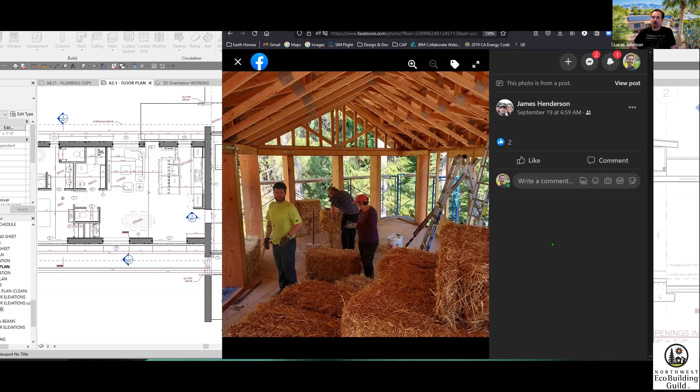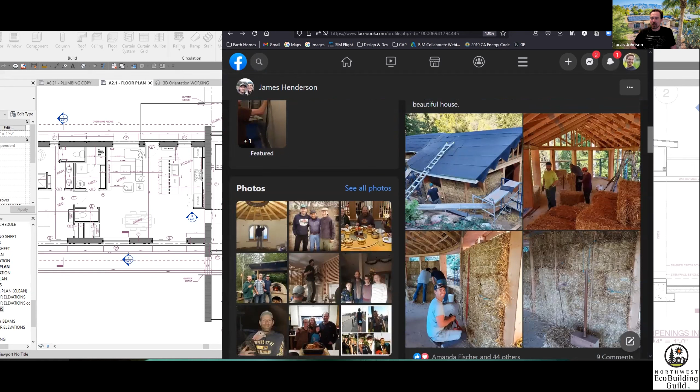And I think it's a pretty genius insight to think about incentivizing the massive farm industry in the United States to create made in American, carbon storing, good buildings. Exactly, that's a powerful message right there. I mean, who wouldn't get behind that one?

And we have to, in the process, make sure that we are not excluding the small farmers. Yeah, absolutely, if we do, we're just perpetuating the same toxic system that got us here in the first place. We're enabling cutthroat capitalist practices to infiltrate the good solutions that need to be kept in the hands of the people and not the elite corporations that are actually using it. Look at how much land just got acquired by Bill Gates, look at how much land just got acquired by very top corporations, by the giant elite marijuana industry corporations.

I want to encourage and invite curiosity, questions like who actually wrote the regulations for the hemp industry, who controlled that process. Because if you look into that, you might be surprised, or you won't be surprised, if you're like me. I just want to be the blunt one that says not everything shiny is actually good for us, even though it might seem like it.

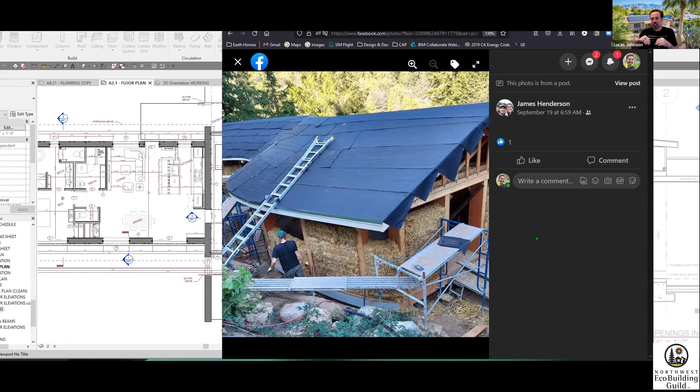Oh, I mean, most things that are shiny are probably bad for us, right? That's the shiniest, like chocolate, I was learning. It literally has shellac on it to create that sheen. Shellac primer, the stuff that's really bad for us, literally comes from the same source to create a sheen. The things that are shiny are not necessarily good for us.

And the other thing, to tie in with the political advocacy side of things, it's incredibly important if we want to have a chance of building healthy buildings at scale, because right now these materials frankly don't exist at scale. It's very hard to get some of these materials at the moment, supply chains, pandemic, demand, all that stuff.

Can I say a few things? Hold on, yeah. Can I say a few things? Yes, and Kathy in one second, after you're done there, could I just interrupt and say a few things? Thank you. Sure, absolutely.

So I guess my point is, if we want to have a chance at making healthy building a scalable thing, that's going to make a real difference in terms of societal scale things like carbon impact, we really do need to figure out how to encourage small production to make these materials available in the United States, so that they're consistently available and affordable. Because right now we literally can't scale more than we're at, we're kind of at the limits of what's available, and we're not doing that many of these buildings.